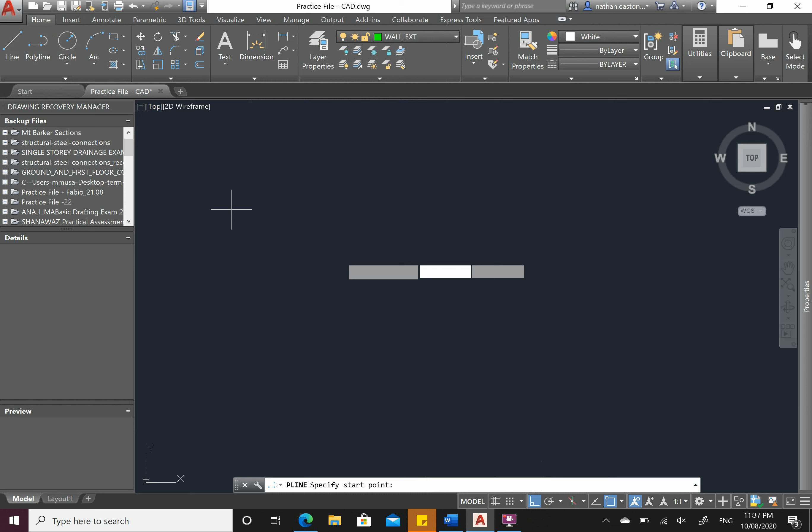So please follow along. Let's go with the polyline, making sure my ortho is on - I can't emphasize that enough. These drawings need straight lines, okay, so please make sure, for God's sake, this is on. Alright, now start anywhere and just follow this.

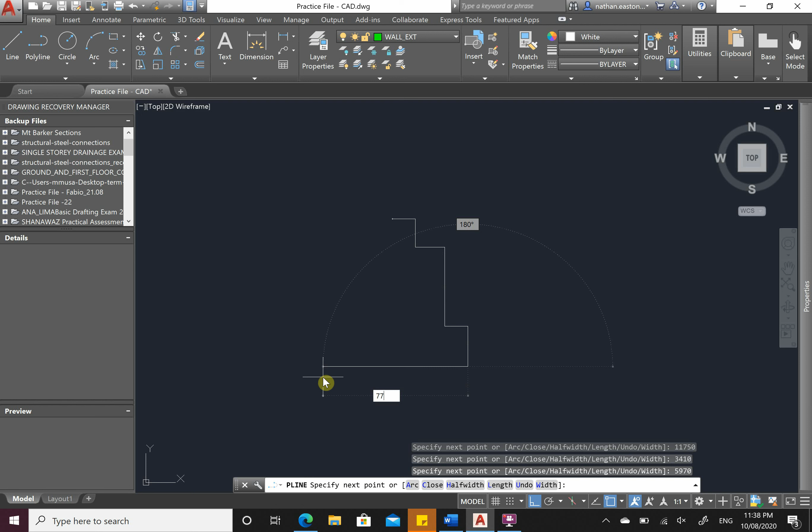So 3360. 4210. Come across 4250. Let's come down 11750. Let's go across again, 3410. Sorry, 5970. Down 2.

Cool, now they will meet, they will line up. But let's go C, enter. Okay, this gets my outside lines, my boundary lines on my house. Now I know I offset my outside wall - my external wall is 240 millimeters to the outside.

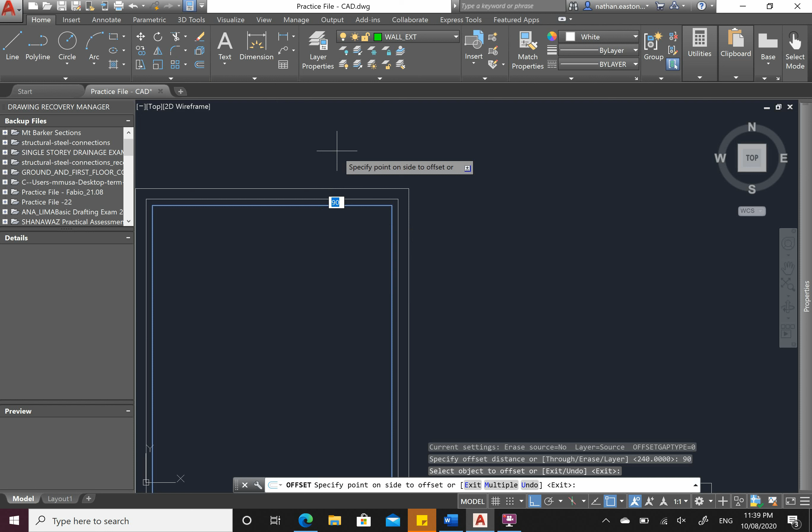Now we have to add in the rest of it. So part of that wall is a 90 by 45 stud, which comes first. After that stud is a 40 millimeter air gap or thermal gap, and at the end is our 110 millimeter brick. So stud, air gap, brick.

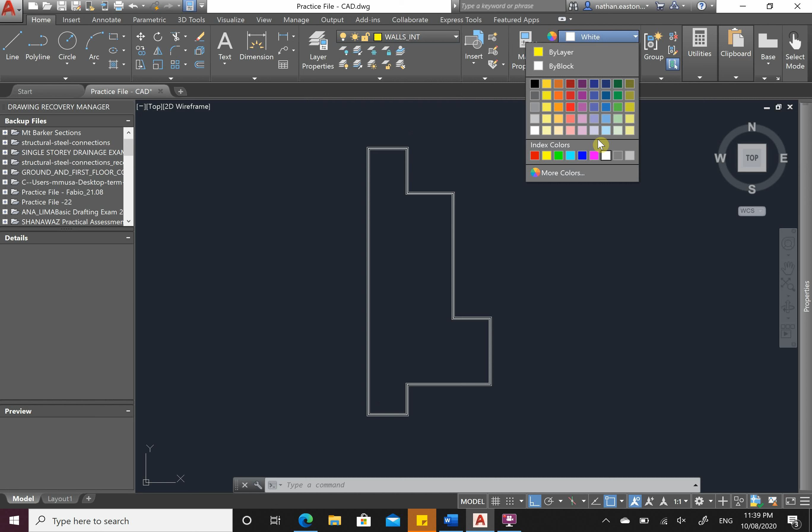Now let's put in some internal walls. Let's change this to be yellow, with a line. So I have one in here, I have one here.

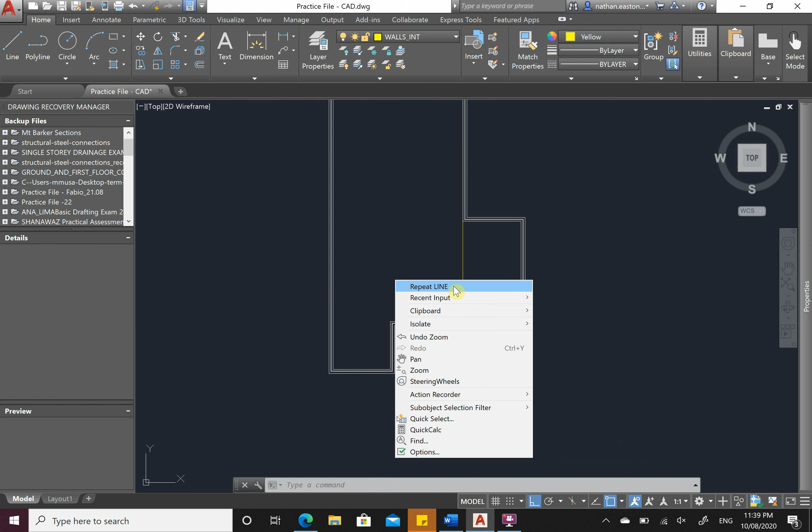Also, to repeat the same command you've just done, right click with the mouse and repeat line - okay, or repeat offset or repeat rotate, whatever you've just done. Always right click will get you back to it. Also, if you're drawing, the right click is like enter. This line here is 13,000.

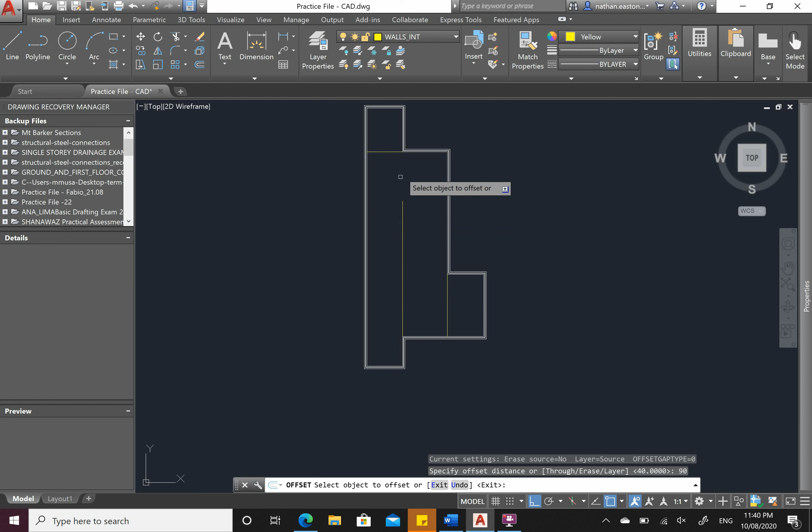Cool, so offset 90. This line up. Alright, we're following the studs, okay, so they have to keep going straight - there's no point putting it over here. All of our top plate and our framing is all looking together.

So what's next? 1, 2, 3. I'm going to put in all my rooms up here. So to put rooms up here, what I'll do is I know the wall is just going to span here - draw a line, select that line, move it straight up to where it's going to be, so 5,000. Cool, offset that one by 90.

Alright, select this line, we can just copy as well. So I can copy this one to be 3200 for the next one, and to get the offset of 90, I can just go 3290, and that will give me my 90mm gap as well - sorry, my 90mm stud. Another one, 3.2, this one's at 1900, so 1990.

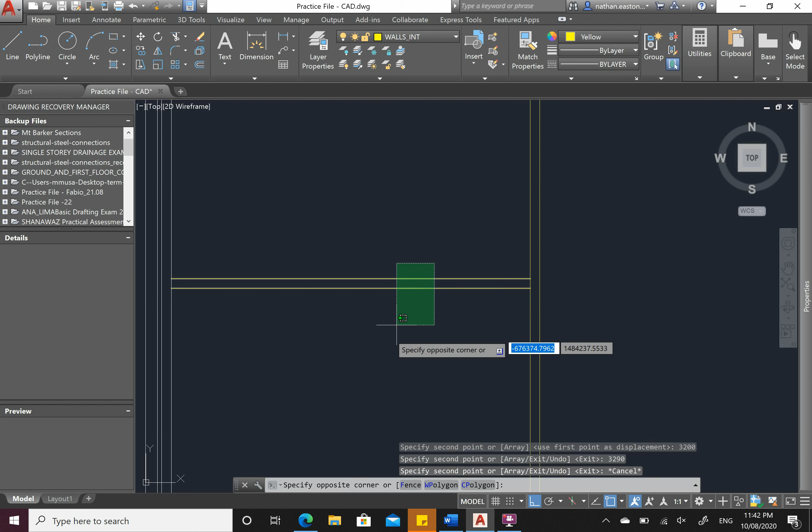Copy this one at 3200. The other thing you can do is just select both of them, copy, and copy the distance to the next line. So my next room is 1500, so 1590. We'll put this here at 1500. So obviously this is a stud wall, so it closes off.

Now we draw our internal walls at 90. In reality, they do have gyprock on the outside of them - could be 10mm, could be 12, but we don't draw them in on our plans. We know it's there, but we just show a 90mm stud wall.

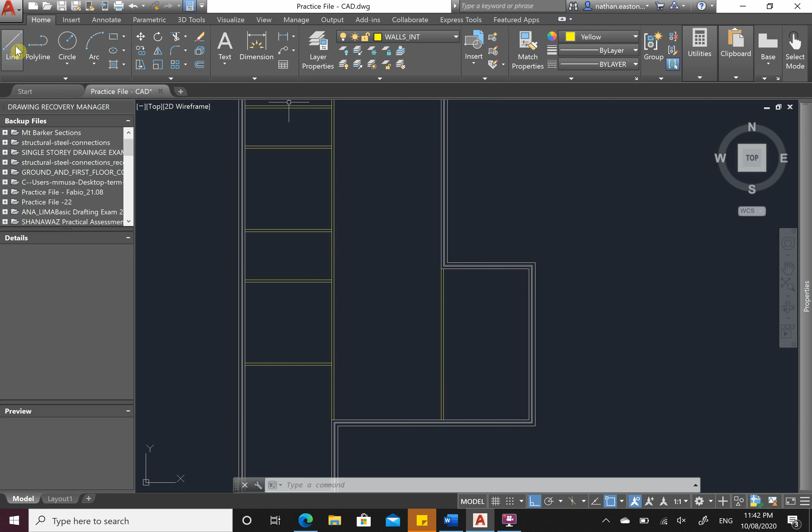What am I missing? Here - this is going to be our main bedroom, so it's got an ensuite and a walk-in robe. So from here to here, move down, and this is sitting at 2000.

Then to get the clear spacing of 2000, my 90 has to come to the other side.

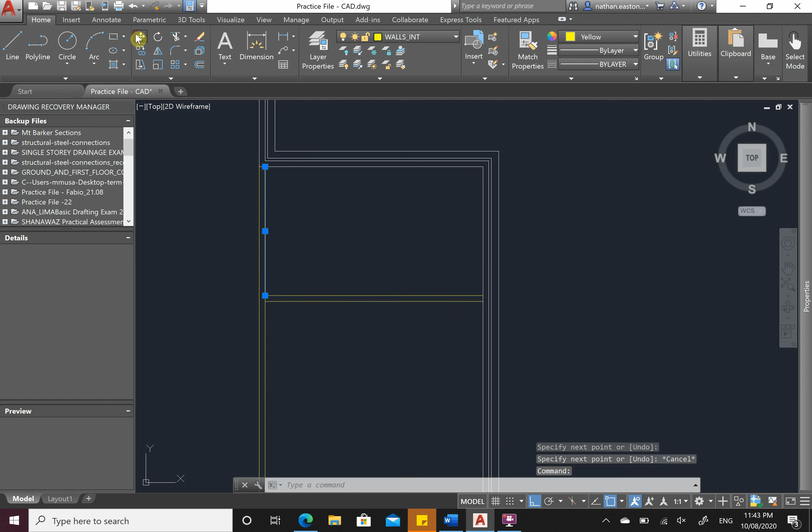Also, I know just from reading, obviously I'm reading all these measurements off of a plan, so I know where everything is sitting.

Alright, so that's the outside of our house and internal walls done. Now what I'm going to do is just measure everything to check it all. I'm not going to measure proper detailed annotations.

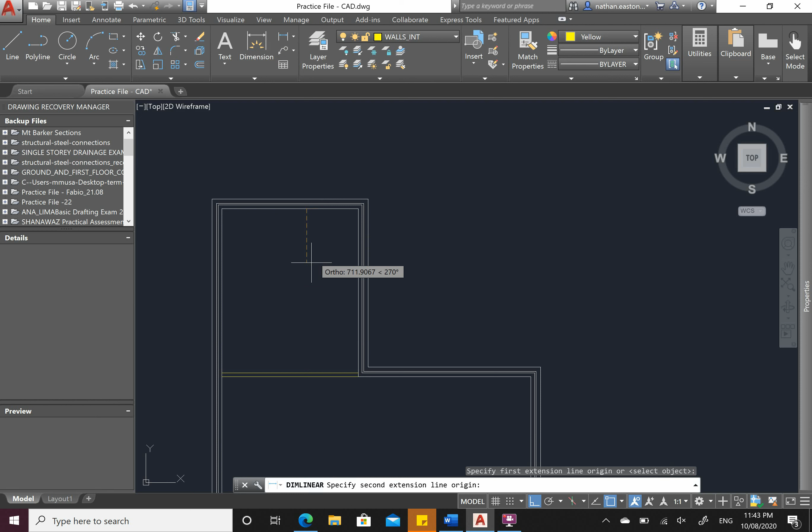What I always do is I just do the internals, and then I'll delete them after. So all I'm trying to do is just check and make sure everything is sitting where I wanted it to go, and then I'll delete them all.

So I think all of this line here is okay. It will make sense as to what these rooms are after, but basically this is a single garage, bedroom, looks like a bathroom, bedroom, storage or a walk-in pantry, kitchen, this would probably be a study, master bedroom, ensuite, walk-in robe.

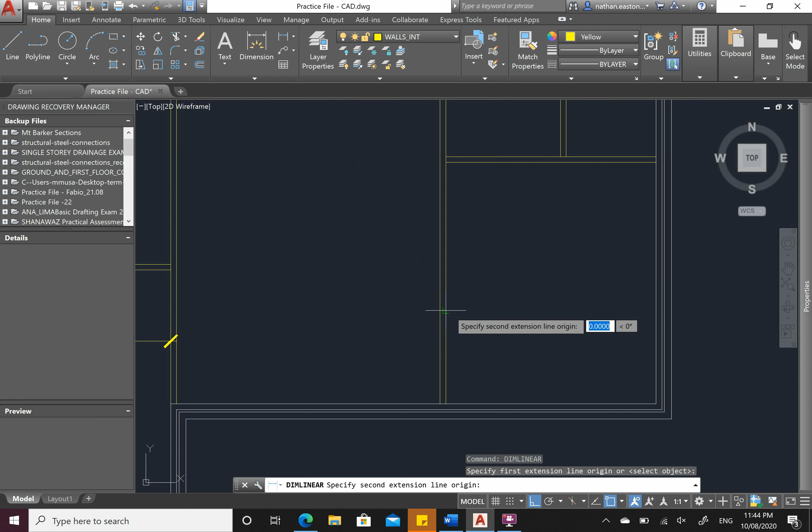It will become more clear when we put all the amenities and everything inside of it, doors and windows, and it actually starts to look a bit more like a plan. So at the moment, don't stress if it just looks like a bunch of yellow and white lines on a page. It will be a bit different.

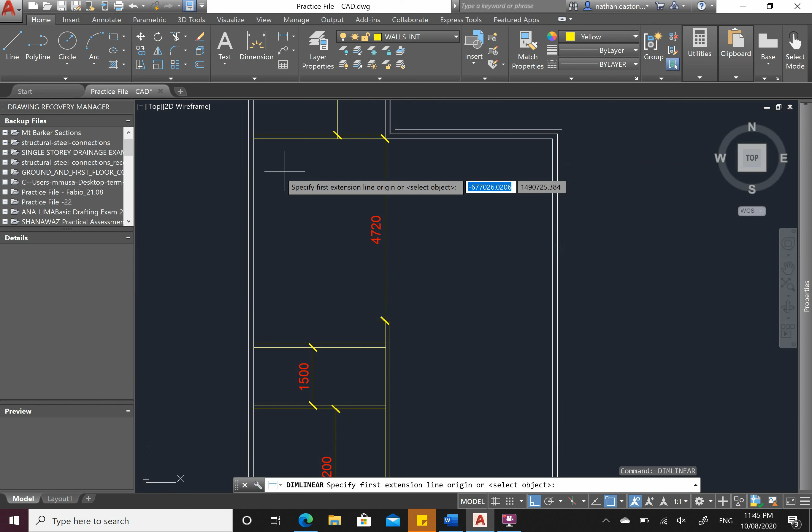So this here is a bit small. Cool, and I'm just going to check here as well, and check the overall.

Alright, so I'm just going to make this a bit bigger to 1500, so stretch. I want to stretch this line and this one, so my green box has to cut them all. So 80, it's 1500, that's okay.

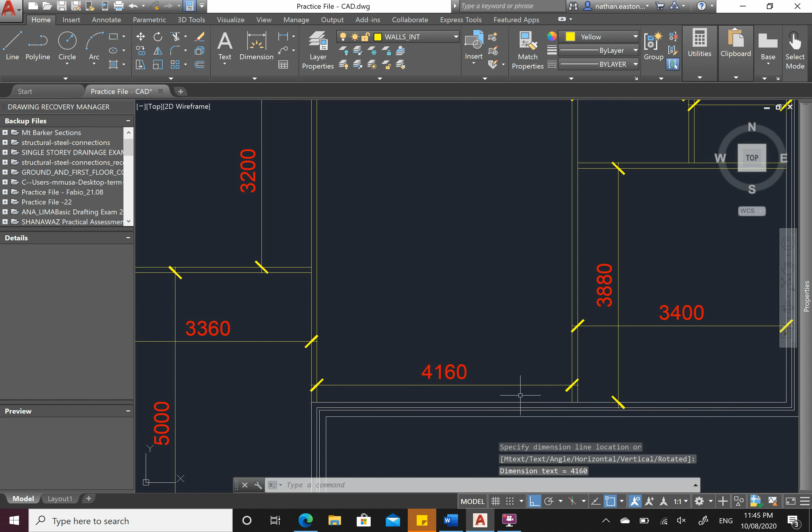And all the other ones here, these ones with 20 and 10 in them, we can get rid of them. Usually we want to try to keep our numbers as whole as possible. So what I mean by that is if I want this to be 4100 exact, I would just start stretching everything to make them all fit one by one. Practice makes perfect with this. Getting used to stretching and what cuts what is very useful.

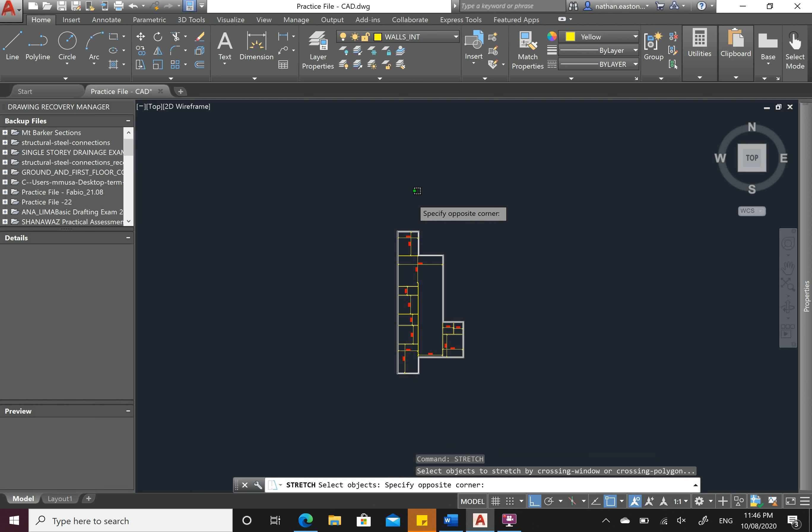I might just stretch through here as well, make it a bit narrower, because I don't really like that 60, that annoys my OCD. Is there anything else I want to tidy up? 1810, that's okay.

4160, why is it? That's annoying. So what we're trying to do is work out, well, if that's 60, where can I take it from? If I take it from here, if I take 60, it's going to end up with 7490 here. If I add 40 to the right, I'm going to get 7590 here. So my OCD can just put up with that for a bit, and I'm just going to delete it because I don't want to look at it anymore.

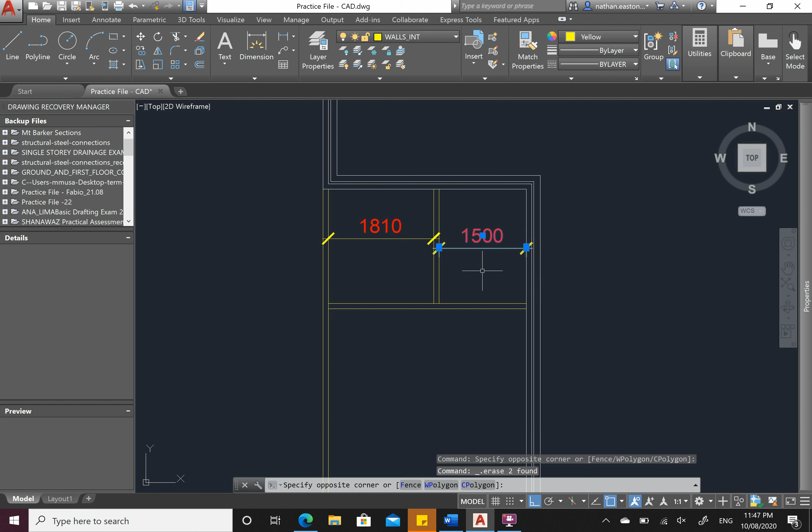So to get them out of the way, I'm happy with these measurements, or most of them. So we will start to just delete them, and then we'll move on to what's next.

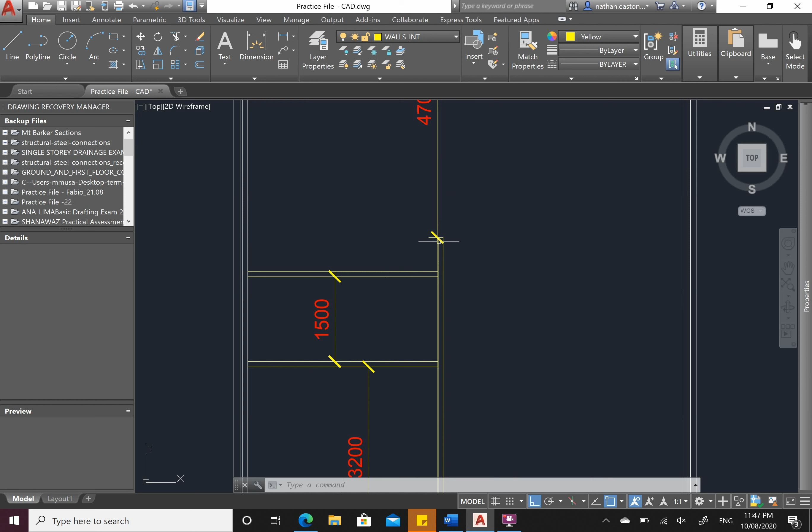So what I'm going to do is, I know this is a bit of a funny house in the way that it's shaped out. I mean, you're obviously going to enter in here, and you've got enough room to kick a football inside. This will be the kitchen, so wherever we're going to cover a kitchen bench, we've got a nib wall here of 600, which is the bench width.

Again, this will make sense when we put everything in there. What I'll do is I'll stop the recording here, and in the next video we'll put in the doors and the windows, the bathroom and things like that, and it will start to look a bit more like a house.